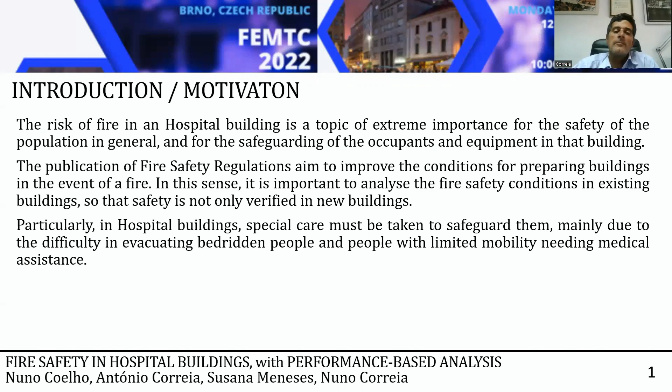So we are going to use a case study of an existing building, and we are going to propose improvements in the evacuation. Particularly in hospital buildings, special care must be taken to safeguard them, mainly due to the difficulty in evacuating bedridden people and people with limited mobility. The current regulation prescribes the performance of fire drills. We all know that this is not easy because it's not possible to carry out fire drills with real patients. So we need as much as possible to carry out numerical simulations to study and to improve the emergency plans.

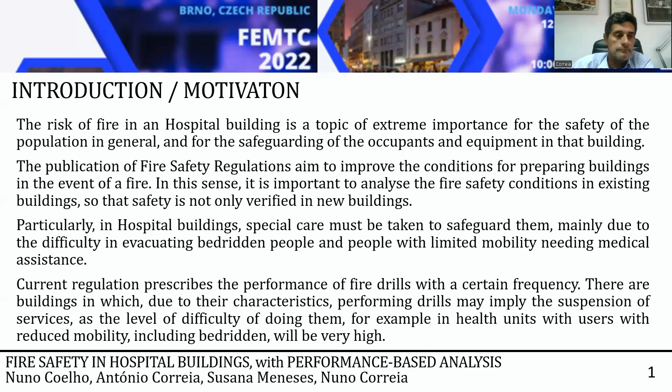So the objectives: first, validate the regulatory requirements on fire safety measures to apply on medical buildings. This validation is important because we need to know, in this case, if the building complies with the regulations, and we want to know if the compliance with the regulation is enough to provide safety to the occupants; analyze the emergency plan of the building, and eventually improve this emergency plan.

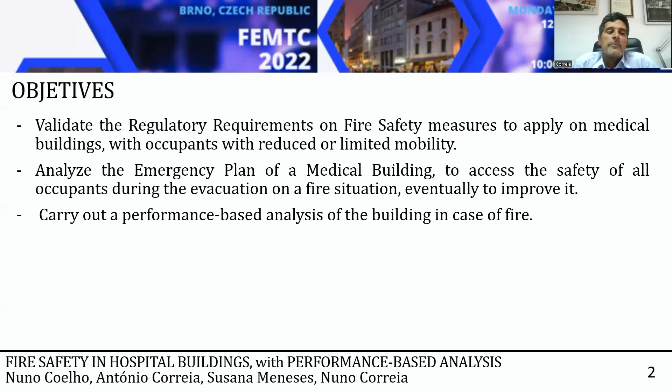Carry out performance-based analysis, because we believe that in the future, special buildings require an analysis of this type, a performance-based analysis, and a hospital is a special building. Test the possibility of increasing the efficiency of the smoke system. We are going to propose new solutions for the smoke control system of the building. Also very important, limit the carbon monoxide concentrations to values that prevent human harm during the evacuation.

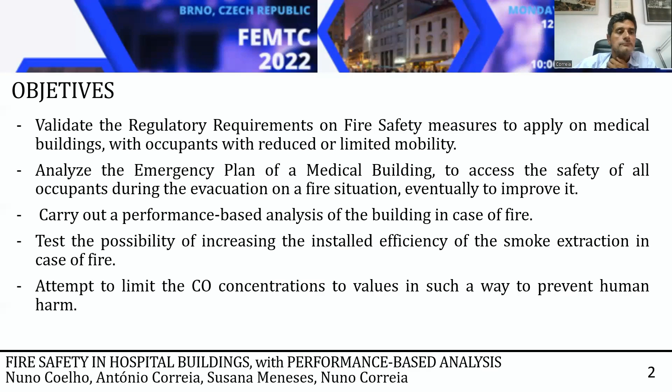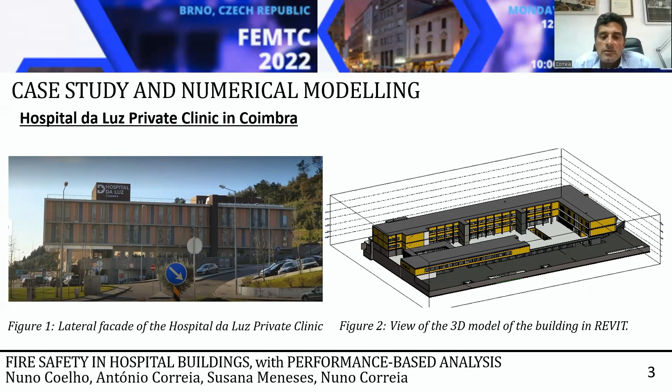So our case study is a private clinic in Coimbra. Hospital da Luz is probably the biggest private clinic in Coimbra. In the left picture, we have a lateral facade of this hospital. And on the right side, we have a picture of the 3D model of this building in Revit.

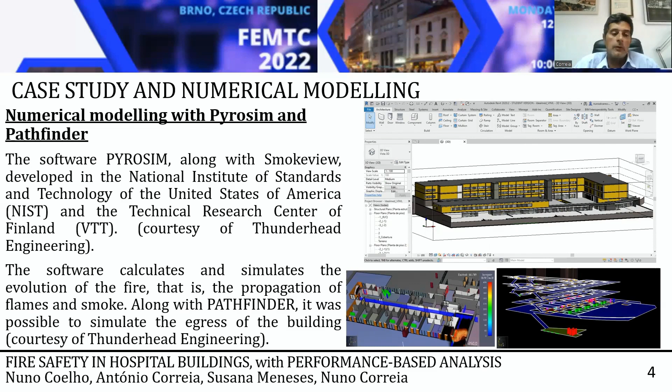And of course, we have used PyroSim and Pathfinder. PyroSim to simulate the evolution of the fire, the propagation of the flames, propagation of the smoke, and Pathfinder to simulate the evacuation of the building, considering the occupants. You are all aware of the potential of this software, and the use of this software in an academic environment is a courtesy of Thunderhead Engineering, and I would like to thank Thunderhead for giving us this opportunity.

Not only the accuracy of the modeling of the building in terms of defining the windows, the doors, the materials. We are putting special attention on the materials of the floors, ceilings and walls. But in this case, it's very important to program our model, the definition of evacuation times.

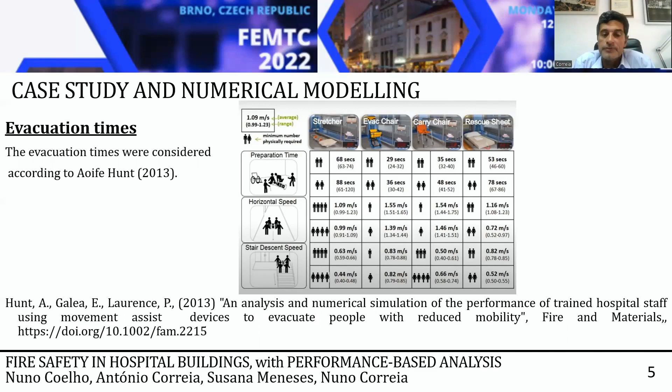We are not using stretchers. We are considering that our patients are going to be evacuated in their beds, and we have considered the values of this study from Hunt in preparation time, horizontal speed, and stair descent speed, depending on whether we have female or male people, and whether we have two persons or four persons. We have here very important information for our simulation.

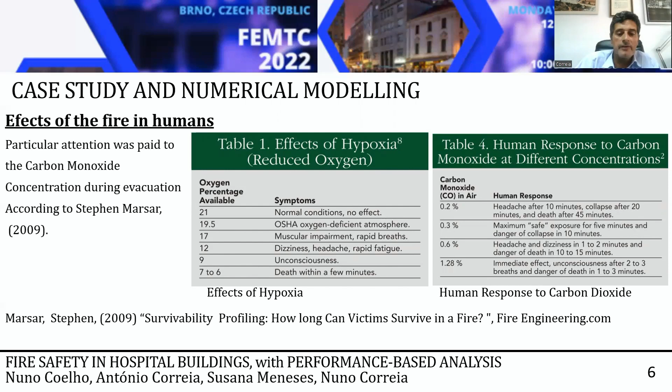Also very important, the effects of fire on humans, particularly the concentration of carbon monoxide and its effects on human beings. We can see in this right table that above 0.2% carbon monoxide concentration, we have headaches after 10 minutes, collapse after 20 minutes, and higher values of carbon monoxide are very, very dangerous for people.

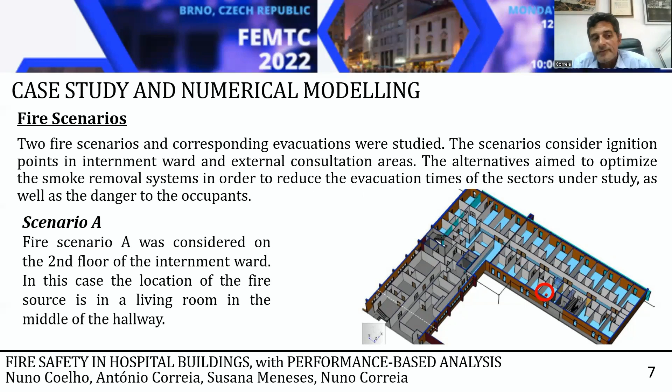So I will now present our fire scenarios. We have considered two fire scenarios in two locations, one in the internment ward and another in the external consultation areas. For each of these scenarios, two situations, one with the existing smoke system and another with a proposal. This picture shows fire scenario A, which was considered on the second floor in the internment ward, in the living room in the middle of the hallway.

Scenario B is in the outpatient consultations. In this case, it's at the reception on the second floor.

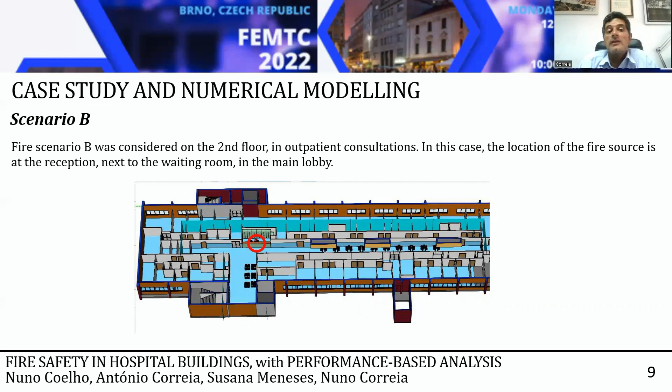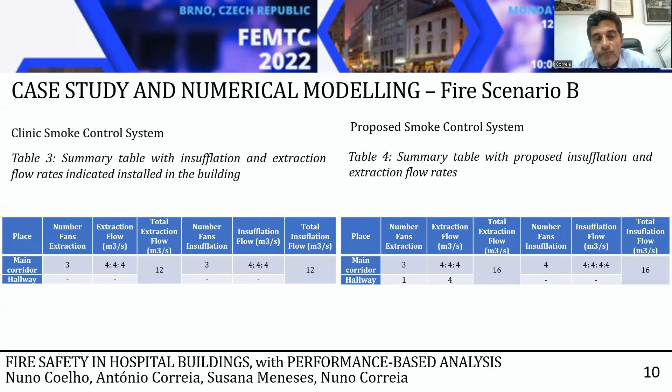Again, these two tables intend to show the existing smoke control system and the proposed smoke control system. We are maintaining, in this case, the existing system, and we are proposing another extraction fan with a flow of 4 cubic meters per second and another insufflation fan. So this way we can increase both extraction and insufflation flows from 12 to 16 cubic meters per second.

Now, some results for scenario A: we have 26 bedridden occupants, 10 medical staff, which are going to help in the evacuation, and we considered that 10 additional staff were needed, maybe firefighters or staff from other services, arriving 8 minutes after the alarm.

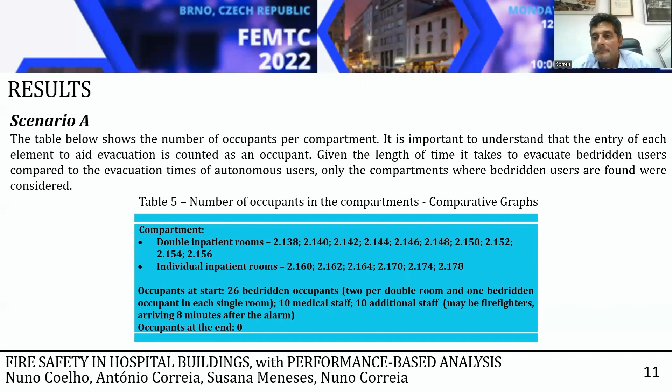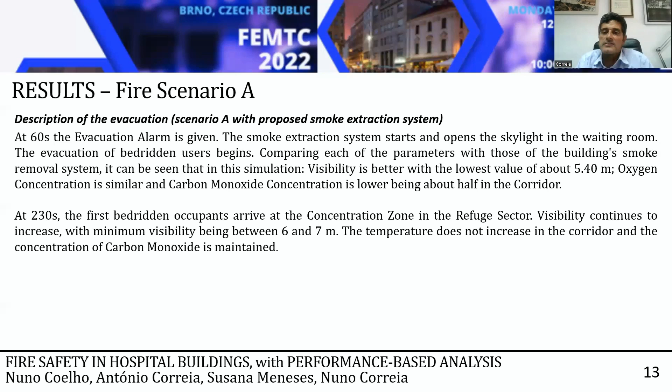I have here a small description of this scenario A with the proposed smoke extraction system. At 60 seconds, the evacuation alarm is given. The smoke extraction system starts and opens the skylight in the waiting room. The evacuation of bedridden users begins. At 230 seconds, the first bedridden occupants arrive at the concentration zone. We have, in both cases, concentration zones to help the mobility of the beds.

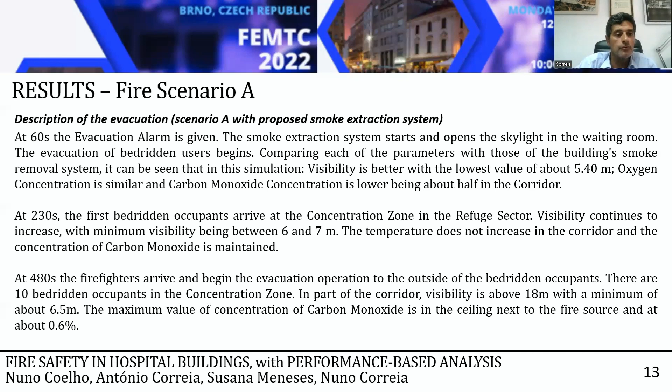At 480 seconds, the firefighters arrive and begin the evacuation operation. In part of the corridor, visibility is above 18 meters, which is very good. The maximum value of concentration of carbon monoxide at the ceiling is 0.6%, which is a very good value. At 550 seconds, firefighters begin removing bedridden occupants.

At 1,160 seconds, the last bedridden occupant is removed from the second floor. So we can see here the difference with the other simulation using the building's system, which is the time. This time is much bigger.

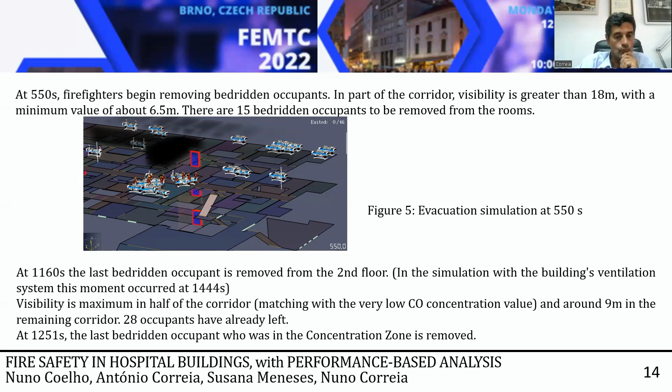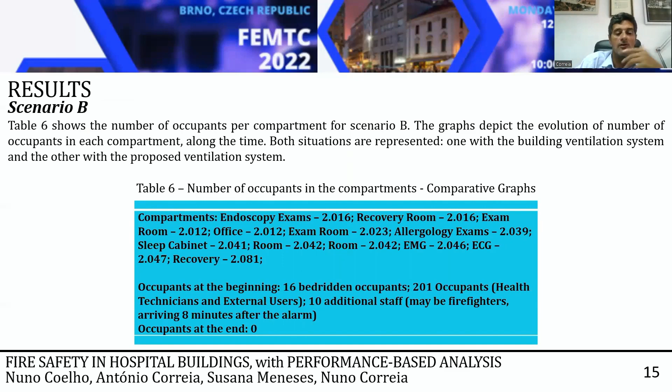For scenario B, we have considered 217 occupants. 16 of them are in beds, and again we have considered 10 additional staff, maybe firefighters or other staff. So I have here some description. Between 20 and 30 seconds, the health technician checks what is happening and returns to the room. At 60 seconds, the occupants were checked to exit via the emergency stairs. The evacuation alarm is given. At 132 seconds, the evacuation of bedridden occupants begins.

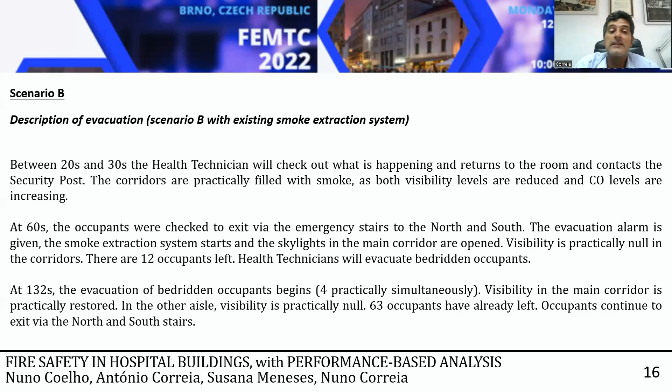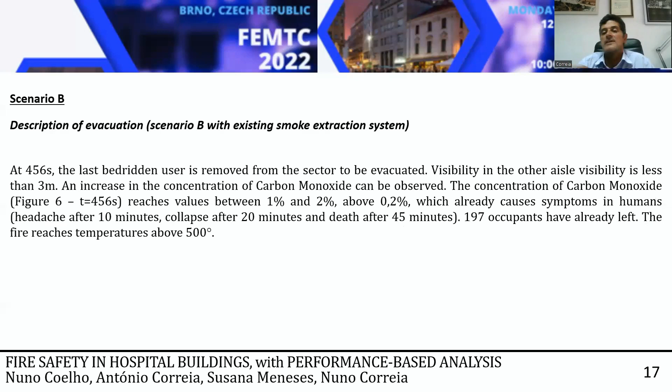Visibility in the main corridor is restored, but in the other corridor, visibility is practically null, because this description is with the existing smoke system. At 456 seconds, the last bedridden user is removed. The concentration of carbon monoxide reaches values between 1% and 2%. So this is much higher than 0.2%, which already causes important symptoms in human beings.

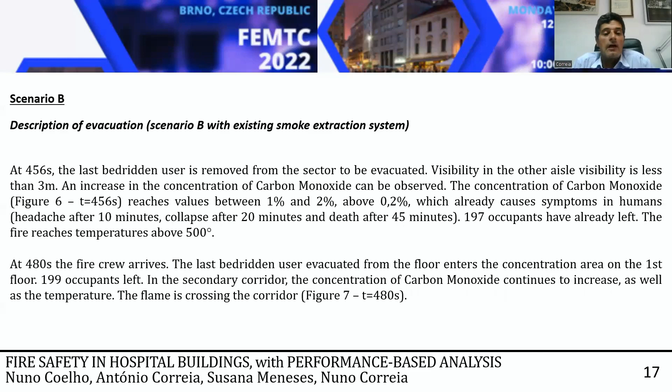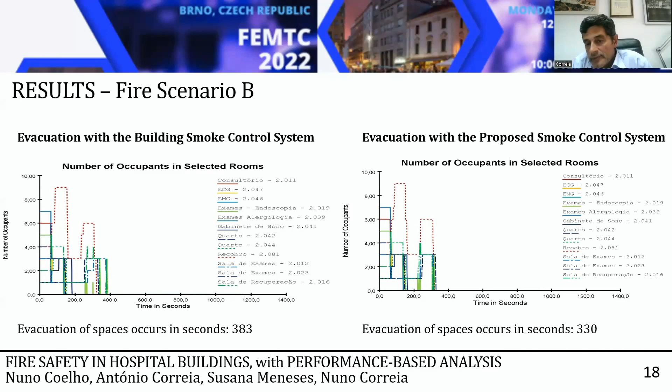At 480 seconds, the fire crew arrives. The last bedridden user evacuated from the floor enters the concentration area. In the secondary corridor, the concentration of carbon monoxide continues to increase. So we can see here that in this case, the difference in time for the evacuation is not so important: 383 seconds with the building smoke control system and 330 seconds with our proposal. So in this case, this proposal is not so interesting.

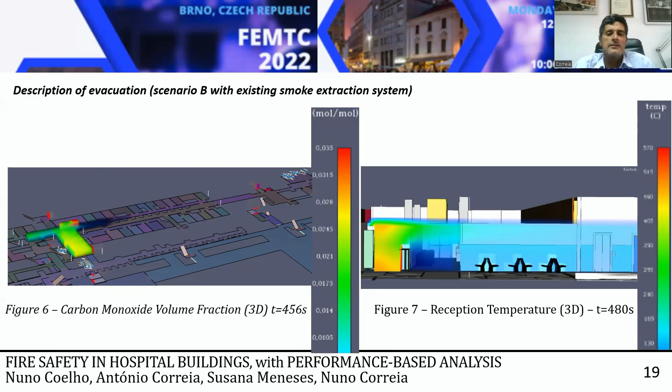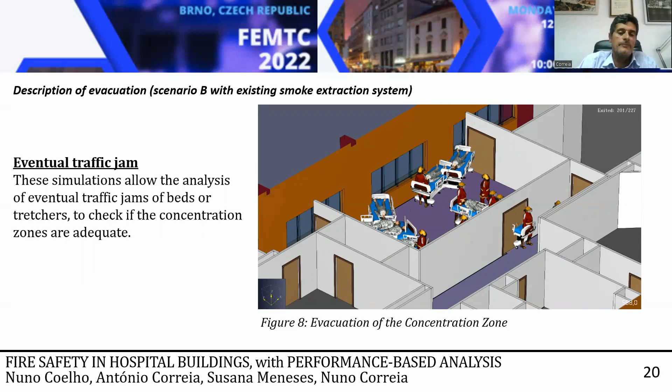Here are some pictures. We can see here the carbon monoxide volume fraction, and the reception temperature, which is about 500 degrees. Another important topic that we have analyzed is the eventual traffic jam in the concentration zones. So we need to know if the number of beds is too big for the place that we have allocated to concentrate and help the evacuation.

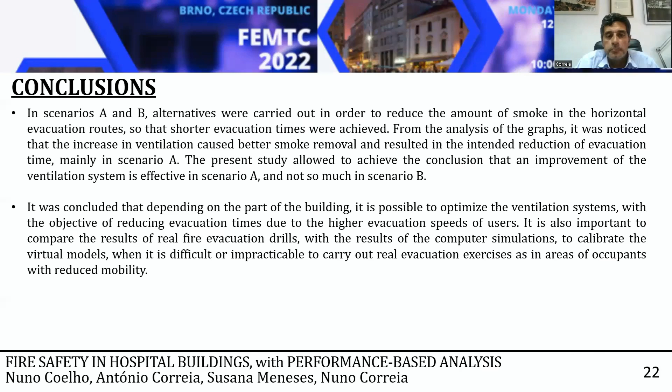It was concluded that it depends on the part of the building, because scenario A is in the inpatient ward, so people are in beds. So in this case, it's beneficial to improve the smoke control system, and not so much in scenario B, in which we have mainly people with no limitation. So in this case, it's not necessary. It's not an advantage to put that improvement in the system.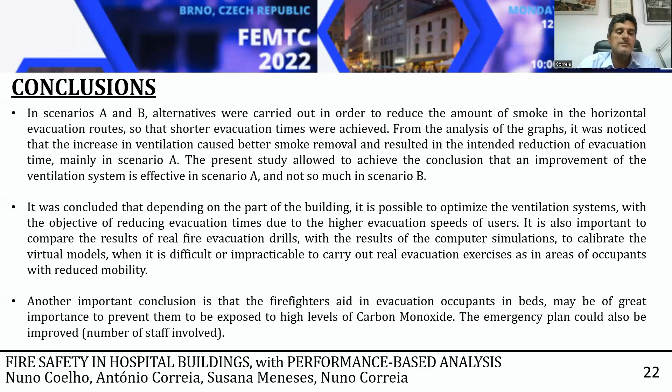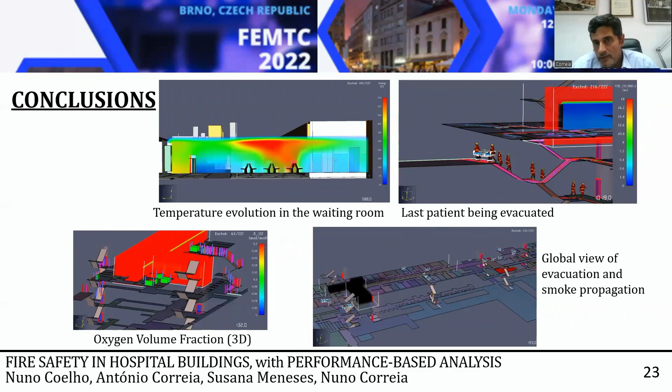Another important conclusion of this work was that the firefighters may be of important help in this evacuation, because we don't know if the nurses or medical staff are adequate to carry a bed down the stairs. So we think that maybe the firefighters could help in this procedure. So here I have some pictures of our simulations, temperature evolution, also the oxygen concentration. We have looked at this topic, and the evacuation of the patients.

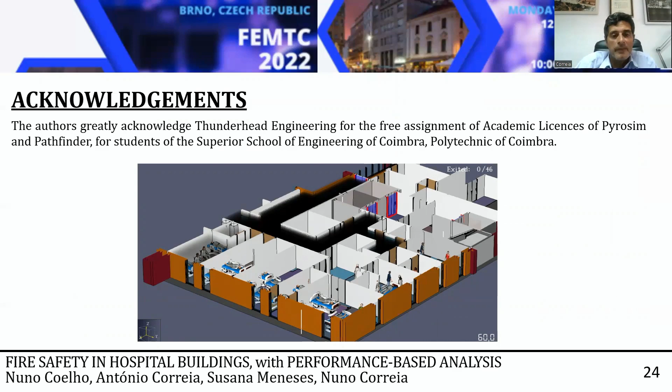Let's see, do we have any questions in the room? Yes, here. And see if you can hear them through the speakers. If not, I can repeat.

Hi, thank you for your presentation. I would like to understand what was the heat release rate that was used in this simulation, and did you consider the interaction between the sprinkler activation and the smoke at the ceiling?

Let me see if I could understand. The question is about the sprinkler system. Yeah, there were two questions. The first is, what was the heat release rate of the fire? And then the second question was the consideration of the interaction of the sprinklers and the smoke layer.

In terms of sprinklers, there are no sprinklers in this inpatient ward. Okay. The Portuguese regulations do not require it for this building. I must say that this is, of course, a special building because we have people with reduced mobility, but it's not so big a building. We have the district hospital in Coimbra, which is 15 stories, okay? Very high building, not this one. This one is a more recent building. It complies with the regulations, but it doesn't have sprinklers, so that's why we didn't consider it.